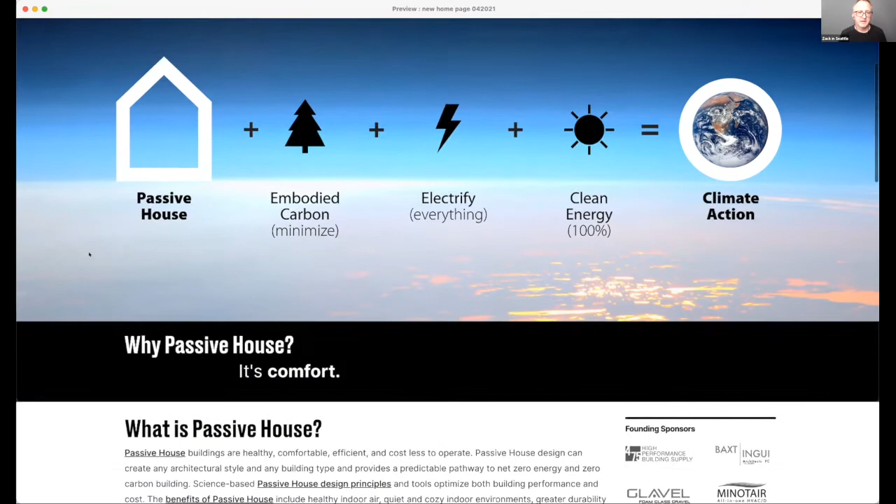And then real fast, I'll share the new concept for the homepage, and then it's time for us to go into breakout rooms. So the homepage will feature the relationship between Passive House and climate action, and the understanding that you start with Passive House, and we're also looking at embodied carbon, electrifying everything, and clean energy. Then we go into the events, explore all these different categories, the most recent stuff that's been published, and network through these directories and the Q&A community.

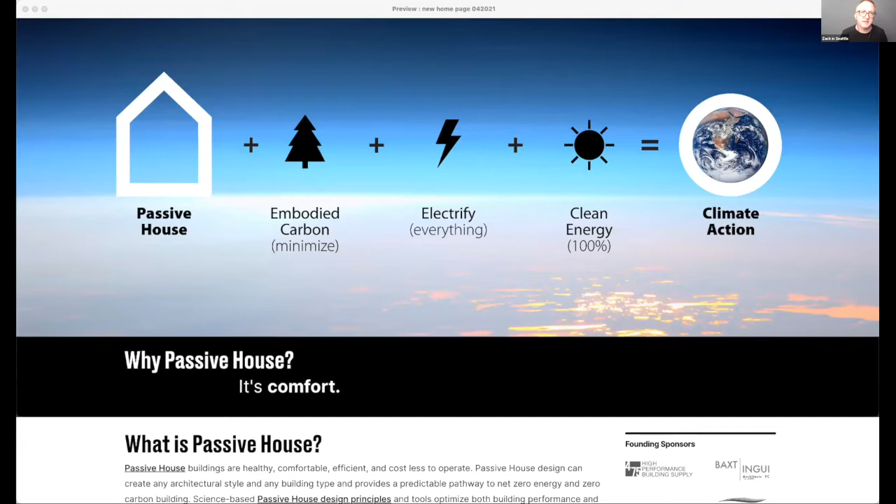Our featured guests this episode, Ryan Lobello and Louis Koehl. Both are certified passive house designers at Handel Architects. Ryan is a senior associate, and his work has been focused on sustainability and high-rise residential projects lately, including serving as the project architect at Cornell Tech's Passive House Residential Tower, the House, and currently serving as the project architect for Sendero Verde, the 709 unit behemoth of goodness in New York City.

And then Louis is focusing on administering construction on Sendero Verde, but also has experience working on the University of Toronto Scarborough Passive House, doing the detailing for the exterior wall, fun stuff. And so together, what they are going to share with us tonight is not just about Sendero Verde, but a comparison to 3 other passive house designs they've worked on: the House at Cornell Tech, University of Toronto Scarborough, and the Winthrop Center in Boston. Thank you, gentlemen, so much for joining us.

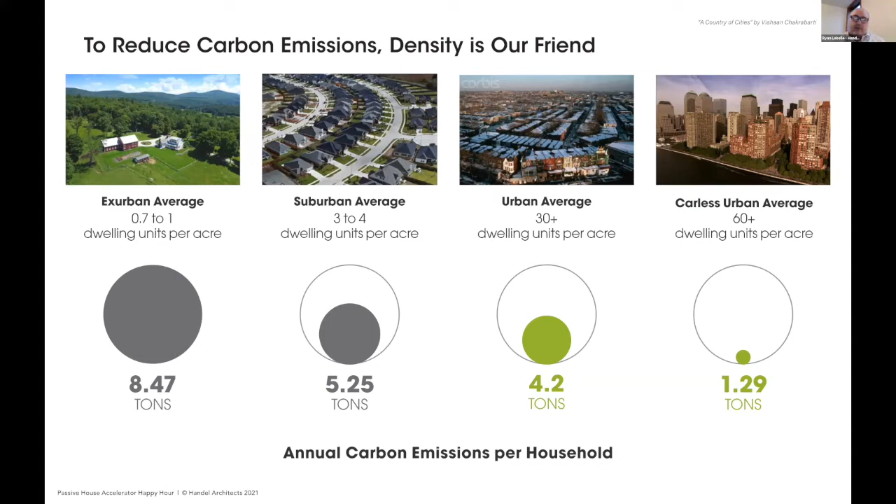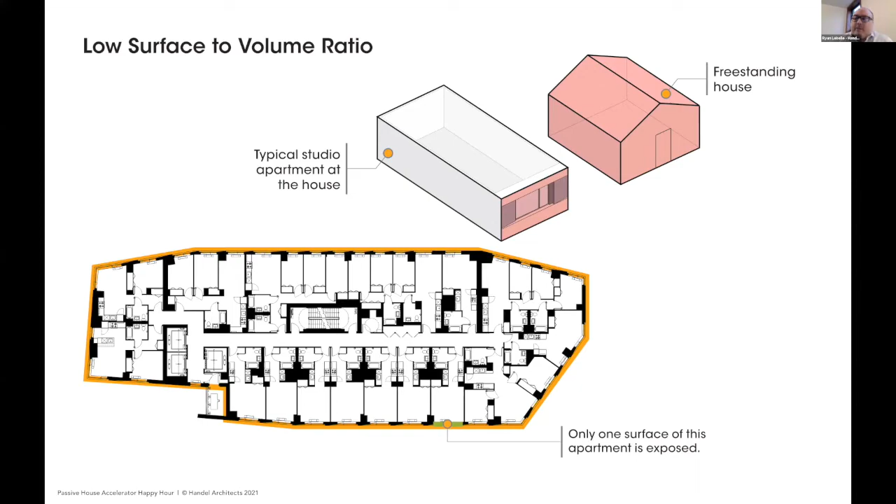Sendero Verde here in New York City. It's a 100% affordable housing multi-building project with Jonathan Rose Companies, L&M Development, and the Acacia Network. Also a partnership with New York City's Housing Preservation and Development, a city agency. It is currently under construction in East Harlem. Over here is Winthrop Center, a very large mixed-use tower by Millennium Partners, currently under construction in Boston. And then University of Toronto at Scarborough, it's a dormitory, a public-private partnership between Fengate and the University of Toronto. The project is in the very beginning stages of construction.

I was the project architect for the house at Cornell Tech. When it was completed, it was the world's tallest and largest. These things tend to come and go really quickly, as you know. Louis and I worked on Cornell Tech together. And then I was also an internal advisor on the Winthrop Center. And then Louis was focusing on UTSC's facade.

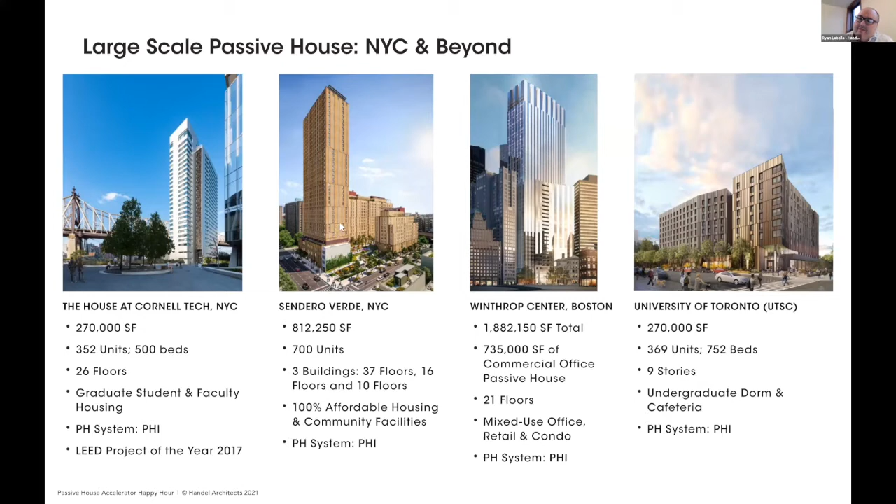I'm not going to go through all of this. We don't have a tremendous amount of time, but a couple of project challenges. Obviously, Cornell Tech was the first time that we did a passive house, and, you know, we're specialists in high-rise buildings, but we had to apply the passive house requirements to the large scale. So that was a project challenge.

We had some code conflicts on Cornell Tech, mainly on the mechanical side, but we were able to get exceptions from the building code department, and those are things that other architects, other developers have been able to use, and now they're no longer problems in the city. Supply chain, you'll see here, I circled it in each project. Each project supply chain has always been an issue.

And supply chain on Cornell Tech, obviously it was at that scale at that time, and there were a lot of issues getting certain materials. But over time, while supply chain is still an issue, it's getting better and better. The same way that codes are increasing and architects, we're all asking for more products from manufacturers. The market is rising to meet that demand, which is fantastic.

The other thing I'll just point out is that these are incredibly dense buildings. Your source EUI target needs adjusting. What was great about Cornell Tech is that we started getting data from that, and we're able to start adjusting the density, the EUI targets on other projects based on real world data. And one thing just to note, as an office building, even in Boston, it's cooling demand driven, even in that climate zone.

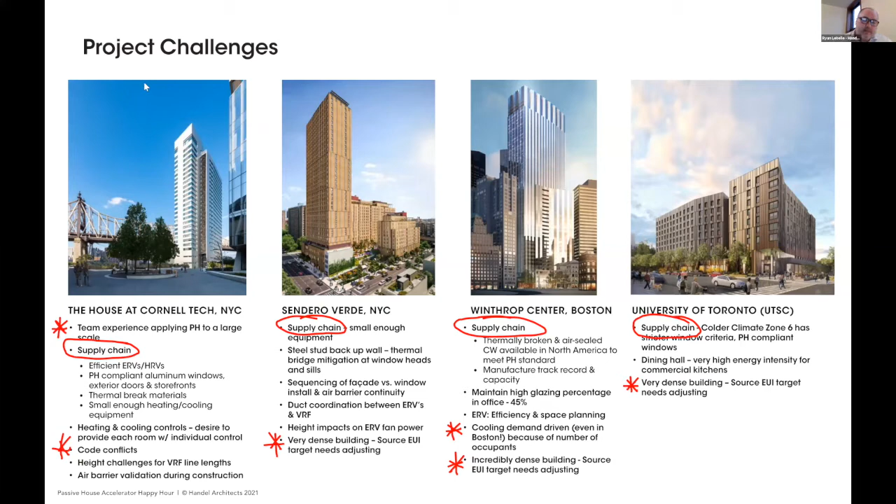Here's some plan examples, comparisons. You can see our original design budget here was 38.1 kBtu per square foot per year. And that was the same when we got to Sendero A, but by the time we started working on Sendero B, the density calculator started to kick in, and we were able to start adjusting for how dense, how many refrigerators, how many people are being packed into this space.

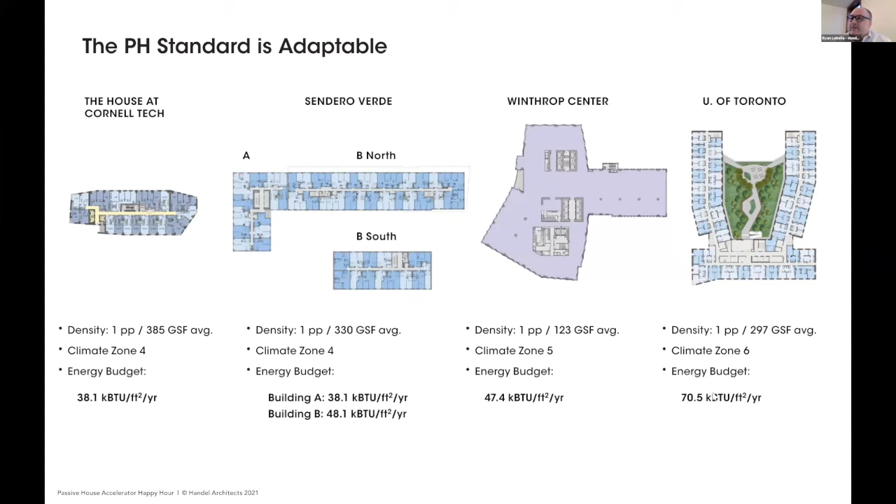I'll also point out the density on Winthrop Center is kind of weird. It's like half density in a way, because from 9 o'clock in the morning till 6 o'clock, it's incredibly dense, and then everyone kind of goes away. So we put the people per square feet in here so you can see what that is. And obviously once you get up to University of Toronto, you're in climate zone 6, so the energy budget increased there as well.

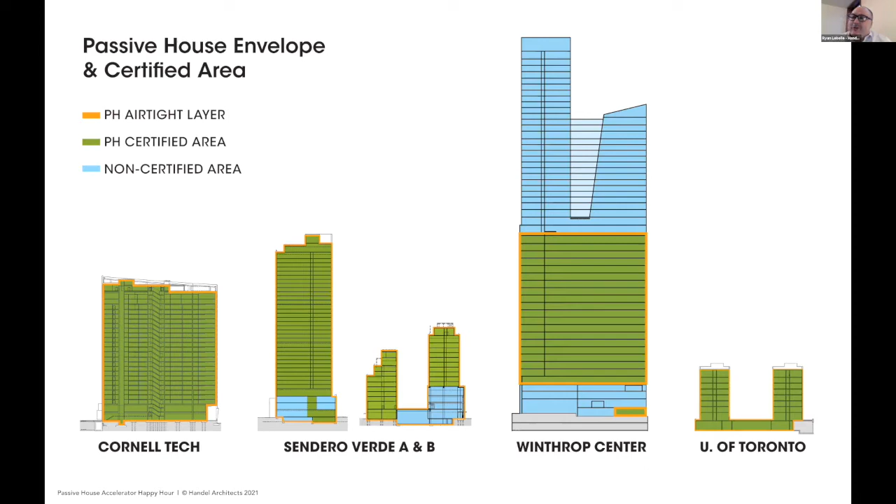And then UTSC's very similar strategy to Cornell Tech, with the exception that we pulled out a loading dock area. But being an undergraduate dorm, there's a dining hall here, and so you start having conversations about reducing energy use. You start saying, hey, can we go meatless Mondays, or you start talking to the vendors and be like, okay, you can have one wok but not two. Those are the types of conversations that we end up having in programming phase. So with that, I'm going to turn it over to Louis to talk about the facade.

Yeah, thanks, Ryan. I'm Louis Koehl, Handel Architects. I've been working with Ryan for many years now on many of these projects. So the facade is obviously a critical part of any passive house. So we're going to talk a little bit about some of the challenges we met here.

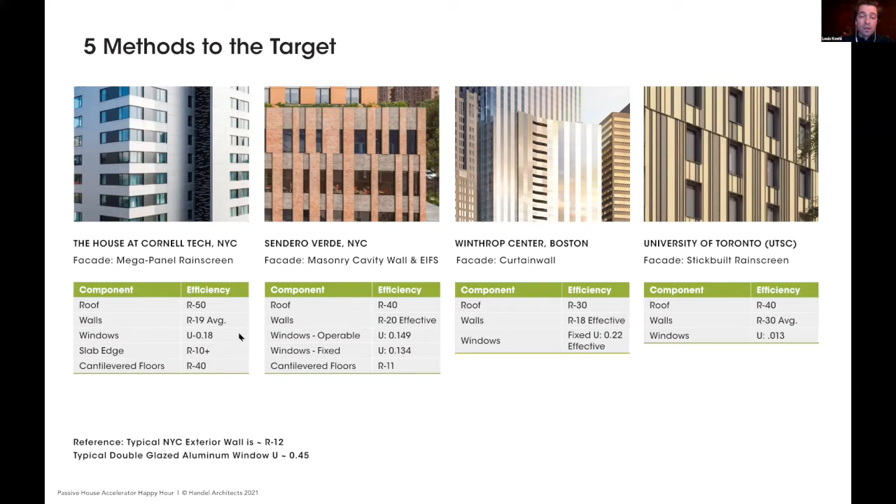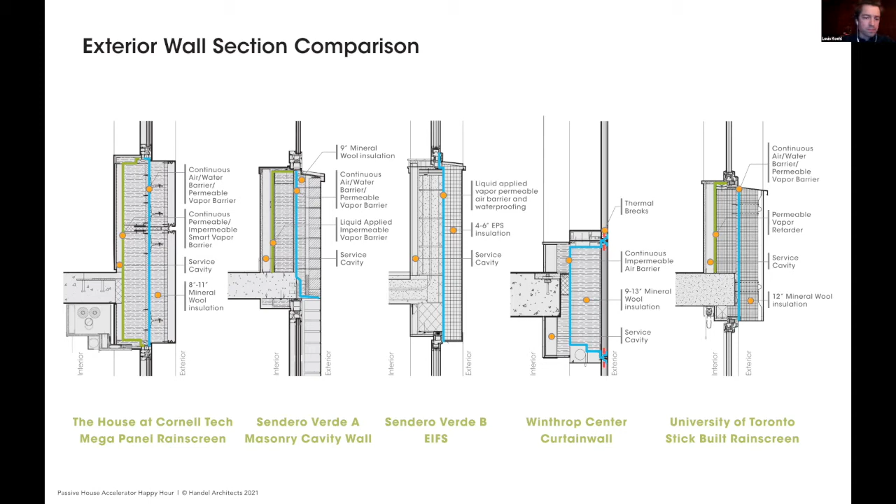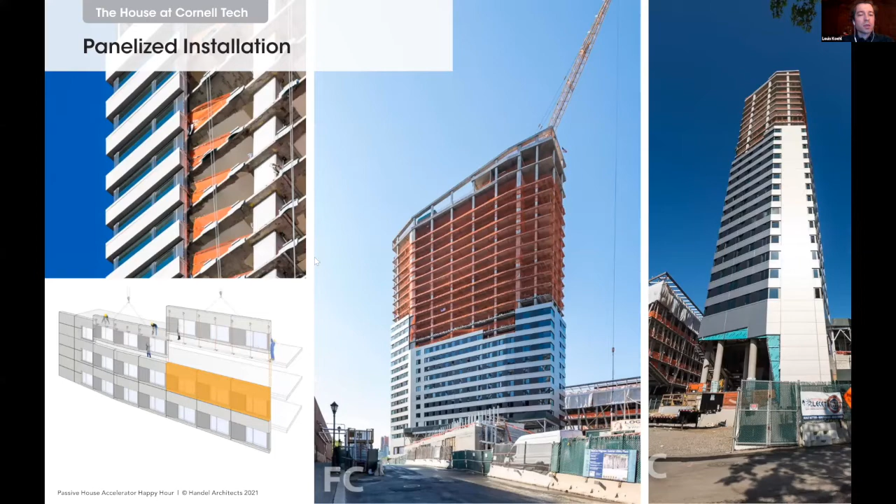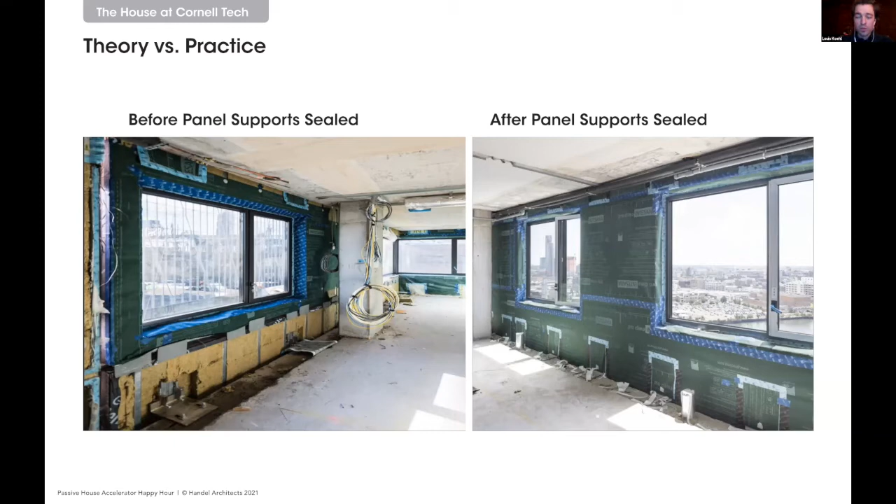So we could actually see the layer and access it, make any repairs that were needed. We could seal everything up around the anchors as each panel was installed, and then we could do guarded blower door tests on individual floors or sections of the building to make sure that everything was going along as planned and there weren't any surprises at the end of the project. Go next.

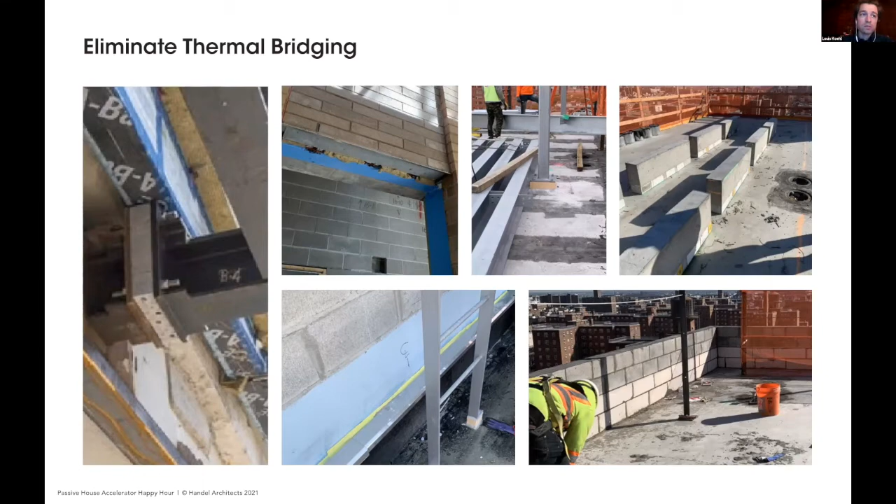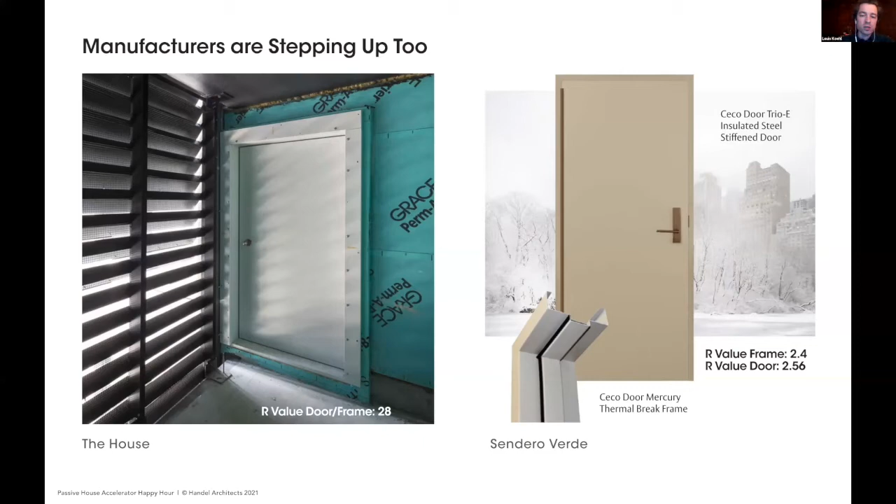Over on the right there, once we got to Sendero, the market had adapted, and now there is a thermally broken hollow metal door and frame on the market. We only need that R2.5. It definitely doesn't need to get to that R28, but just that little bit. When we work through the installation details, we can make that work with our model. Go next.

With the EIFS system, we really pushed to get a mineral wool system. The market didn't quite get there. We weren't able to use a mineral wool EIFS system, which exists in Europe and Canada, but doesn't exist in the US market. Sto has since introduced one, but not in time to get on this job. So we used EPS. So we sacrificed a few points on our R value to save some carbon emissions. And of course, we're all looking forward to the day when we can grow our own insulation with mycelium.

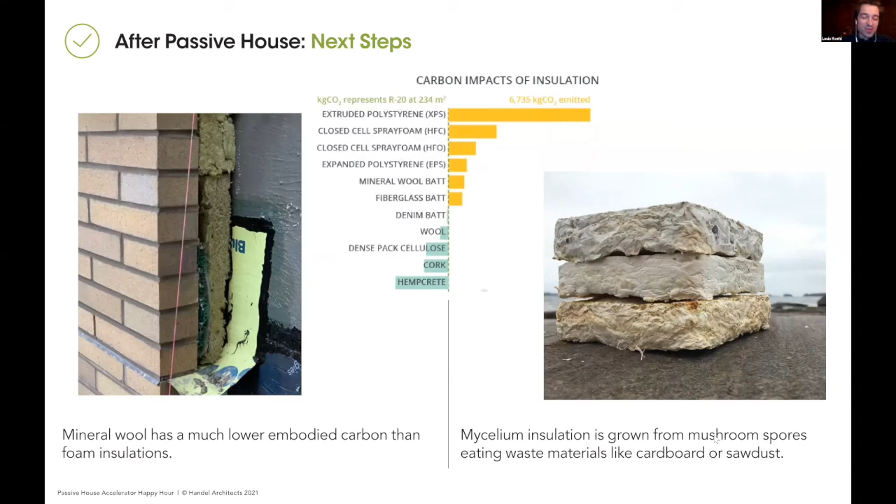You know, hopefully that'll be in all our projects one of these days. And so here we are, a robust facade and efficient and balanced heating and cooling with energy recovery. And what we've just done is reduce the energy use in our building from 130 EUI, that's based on a 2018 New York City standard, down to about 38 to 50 EUI, depending upon your density.

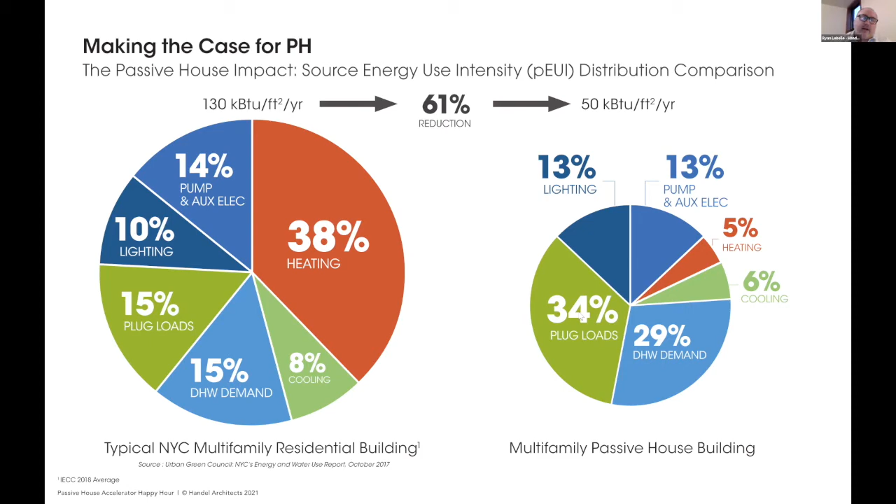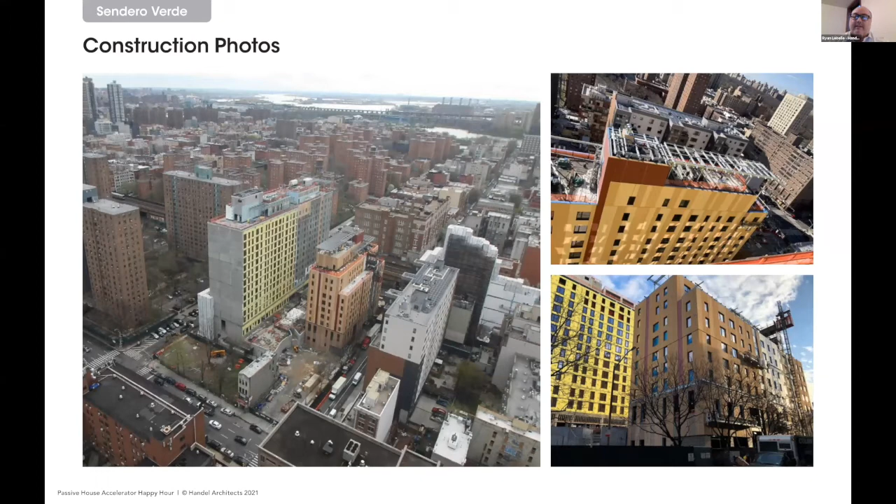But don't forget about a couple other important reasons why we like Passive House as a main strategy towards green building. And that's because Passive House can enhance the occupants' lives. There's an acoustical quality, a quietness to the space. The interior and the exterior is air sealed and insulated. This is the Queensboro Bridge in the background of this image here. That's eye level with some of our units.

Our 15th floor is eye level with Queensboro Bridge. That's rush hour traffic twice a day. Just imagine the noise. New Yorkers like to honk their horns. And when you shut those windows, you don't hear anything. So Passive House is ideal for these noisy and urban environments. And what it allows, it's this quietness that's important for mental health.

Passive House is about a comfortable temperature and thermal criteria, options for control. Of course, we can open our windows. It's about low cost for heating and cooling. In a conventional building, air conditioning may cost upwards of $150 a month in New York City. Now, what if that cost is reduced down to $10 or $15? Well, that choice is a lot easier and can really impact people's lives. And for us, this really starts to speak to equity in green building.

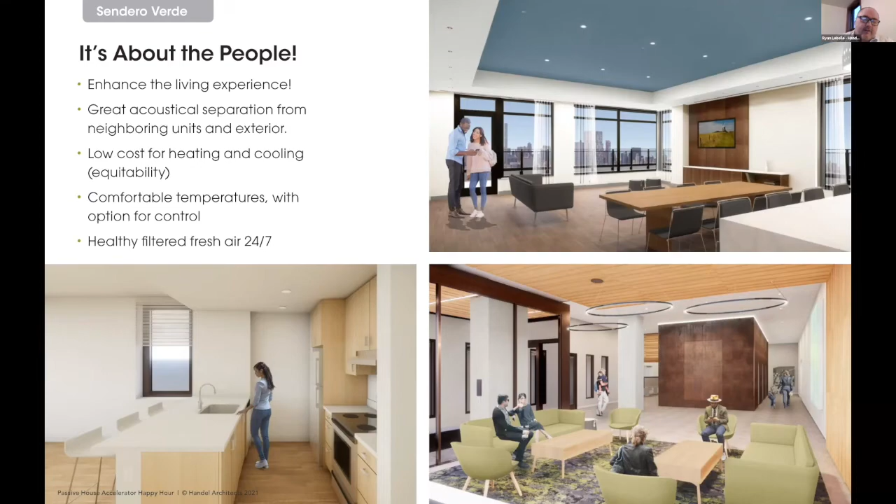And just to reiterate, we are also providing healthy filtered fresh air 24/7. This increase of interest in health and wellness is a main driver that we're seeing not only with our clients, but one of the main places we are seeing concern for green design concepts starting to percolate into the general population, affecting marketing and leasing too. And just to conclude, at Handel Architects, as you could tell by the talk, we feel Passive House is one of the best strategies we have to protect this house.

Thank you. All right, that was fantastic, guys. Not only was that totally spot on, but for anyone who's doing Passive House consulting, that's the way to put together a pitch deck, man. That's how you do it. Right on, guys. Thank you.

So we're going to start with some general questions, concierged by Sean, and then are you guys going to hang out with us for the after hour? I can hang out like half of that, but then I got to leave at 8:30 my time. How about you, Louis? Yeah, same here. Right on. Got to head out at 8:30. We'll take whatever you can give us.

All right. Excellent. So we have Harvey who asked a question, and I think the answer kind of carried on, but I think you really want to be first in the queue. So Harvey, did your question get answered? Well, I think it did. I just want to congratulate you guys. That was a fabulous presentation. And as good as it was at the beginning and the middle, the end was phenomenal, Ryan. Way to close. You really hit it. And my question is, what were the lessons learned that you can pass on to us and to your next projects? That was all.

I think you've answered some of them, but if there's any talking about low-hanging fruit, what would they be for us as our takeaways? And thank you.

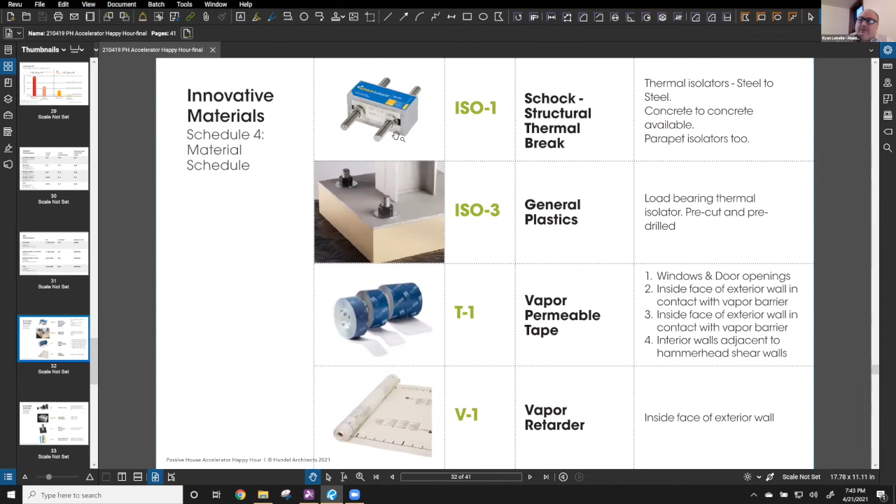And Louis, I don't know if you want to talk about a few of these. You mentioned the Schöck and the General Plastics in the presentation. I don't know if you want to talk a little more.

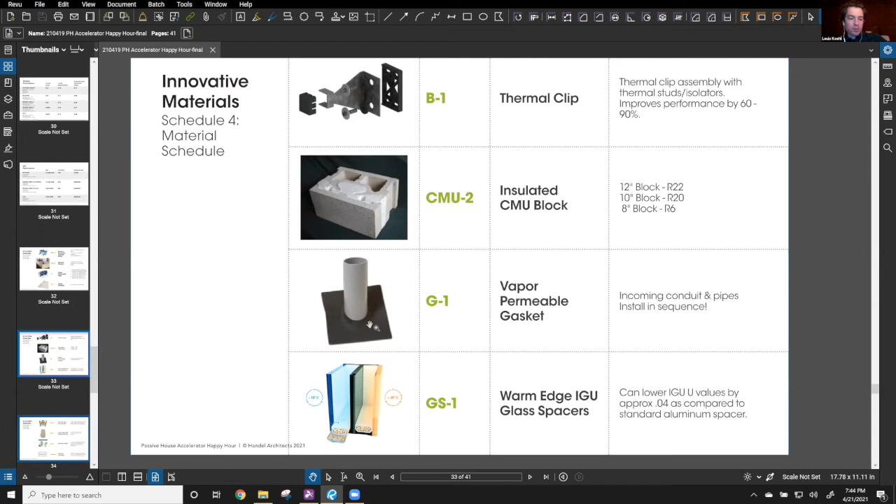In general, these are probably pretty familiar to most. Thermally broken clips. We are using a Cascadia clip on UTSC. Insulated CMU block, we should probably remove. We're not really using that much anymore because of the AAC. Gaskets, warm edge spacers. These are things you're starting to see in every project.

Mineral wool backed EIFS. I think that's a lesson learned: just really push vendors. Bring it up with vendors, especially on large projects like this, where the project's going to go on for a few years. When we first started talking about mineral wool EIFS with this representative from Sto, it was kind of like, it's never going to happen in America. And by the time we were buying out the job, he was, give us a couple more months, it'll be on the market.

People are excited, and they're seeing what the future holds with new building codes. And vendors are interested to hear from us. We talked to Mitsubishi. There's a lot of different vendors that we've spoken to that are very interested in getting technologies and products that meet the needs of passive house and what we think will become the future of building codes.

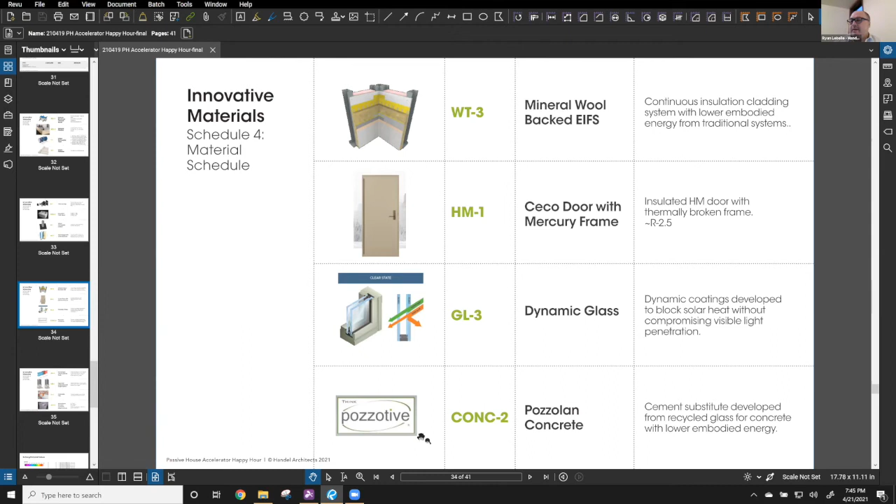Yeah, I'd just add the dynamic glass. On some of our highly sustainable projects with really good budgets, we're getting dynamic glass in there as well. That's allowing us to increase our window wall ratio. The pozzolan concrete is really speaking more towards the embodied carbon. And then last, this is the Cascadia clip that Louis mentioned.

We're using this type, or like a Green Girt. This is not just for passive house projects. This is for everything. So that's reinforcing that the stuff we're working with right now are things that the entire industry is going to be working with in 5 years.

You'd hope to see some significant price decreases then, irrespective of lumber and other price increases. Oh, don't talk to me about lumber, Harvey. Okay, I won't. But other than that, because right now lumber prices are through the roof and causing all kinds of problems on all kinds of projects.

No, I recognize that, but are you starting to see, from the beginning of this to now, and looking out in the future, with a lot of the products that you're showing, plus your suppliers, some drop in price because we're seeing some economies of scale?

Yes, absolutely. Like the General Plastics block that we bought for Cornell Tech, we're actually using Armatherm blocks in similar applications, and they're cheaper. There are more manufacturers in the marketplace, and the price is dropping.

Great, thanks so much, guys.

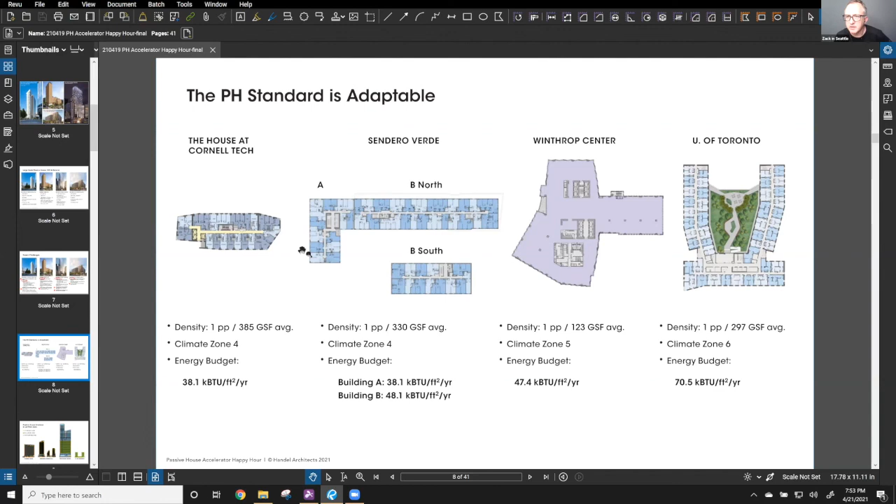Hey, Ryan, we have a request for you to bring up the wall assembly details. Ooh, fellow nerds unite.

The one that was tricky for me is the triple glazed curtain wall on Winthrop. This needs to be a vented light. Otherwise it would get too hot. You start to have glass popping and distortion displacement. And so our air boundary actually had to go along the back pan. It was a very interesting detail, but since it's all made in the shop, it was achievable.

And in terms of supply chain for that Winthrop project, that was a real challenge. There are a number of manufacturers in North America who make triple glazed curtain wall, but not at the scale that we needed for a 1.8 million square foot tower. And so it was a challenge to identify the manufacturer on this project. Who'd you go with? I have my cheat sheet here because I'm no longer on that project. I'd have to look. Give me a second, I'll find it and let you know a little later.